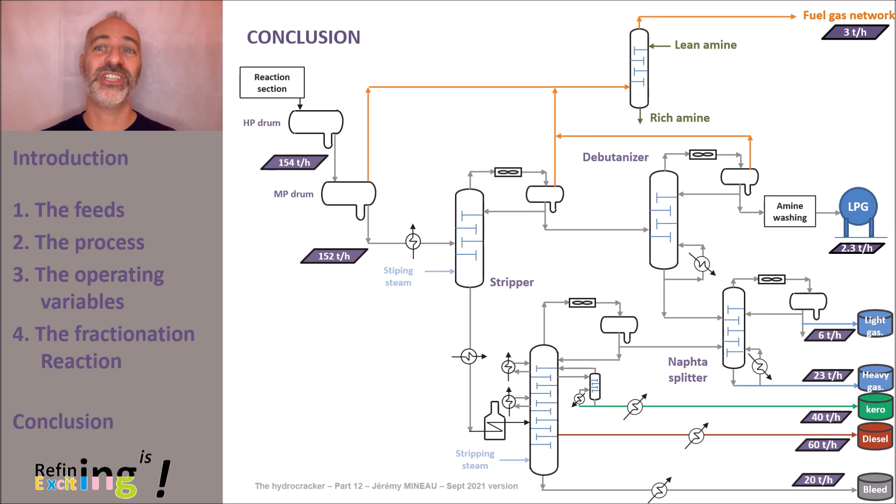Let's now have a look at the properties of the products and compare them to those of the FCC. Let's start with the fuel gas and LPG cuts. These cuts are H2S free since they have been washed with an amine. The main difference with the FCC is that these cuts do not contain olefins, so they are totally saturated. Indeed, the LPG cut of an FCC contains a significant amount of propylene, which will not be our case.

In terms of mass balance, if you remember the MOOC dedicated to FCC, we produced a quantity of fuel gas of about 5 tons per hour for a total feed of 150 tons per hour. In our specific case, we will produce 3.8 tons per hour of fuel gas, including 0.8 tons per hour of H2S. Note that in the fuel gas section of the FCC, we had about 71 weight% of C1 plus C2 and 28 weight% of C3 plus C4. In this cut from the DHC, we will have 25 weight% of H2S, 25 weight% of hydrogen plus C1 plus C2, and about 50 weight% of C3 plus C4.

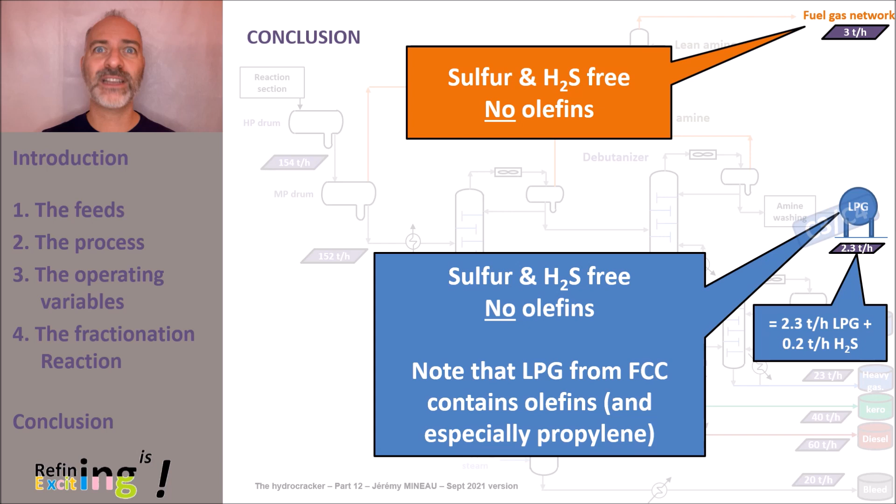As far as LPG cuts are concerned, in the FCC we produced about 23 tons per hour. Here in the DHC we will produce 2.5 tons per hour. These two streams are almost exclusively composed of C3 plus C4.

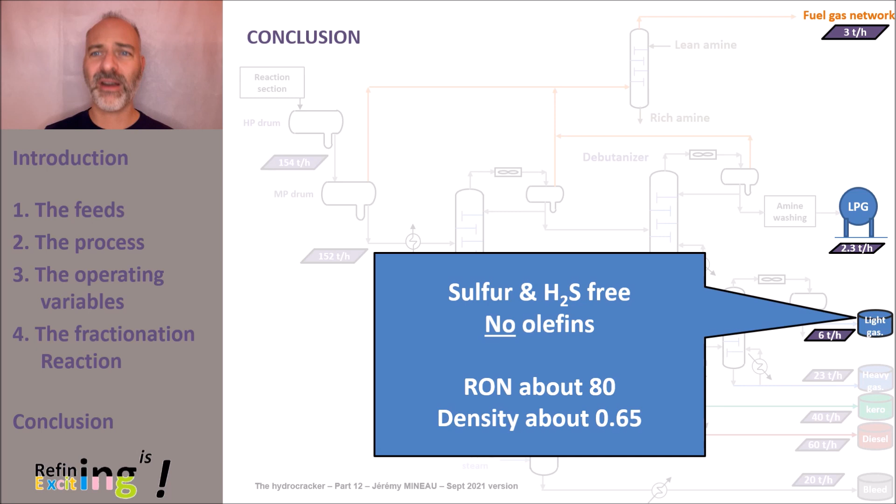Light gasoline is completely sulfur-free, since it was produced in a reaction section in the presence of hydrogen. It therefore does not require any hydrotreatment. This stream has a RON of about 80 and a density of about 0.65. It is a very paraffinic cut. Here we produce about 6 tons per hour.

For heavy gasoline, it is quite similar to light gasoline in terms of sulfur - this is an absolutely sulfur-free cut. Its density is about 0.74 and it is a very good naphthenic cut, so it will be a very good feed for the reforming unit of the refinery. Here we produce about 23 tons per hour of heavy gasoline. In the DHC we will produce about 30 tons per hour of total gasoline, whereas in the FCC we will produce a mixture of LCN plus MCN plus HCN of about 72 tons per hour.

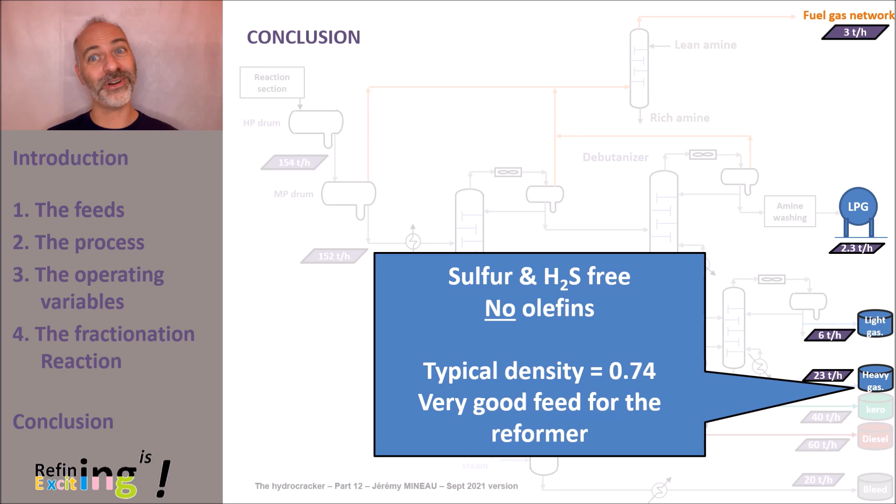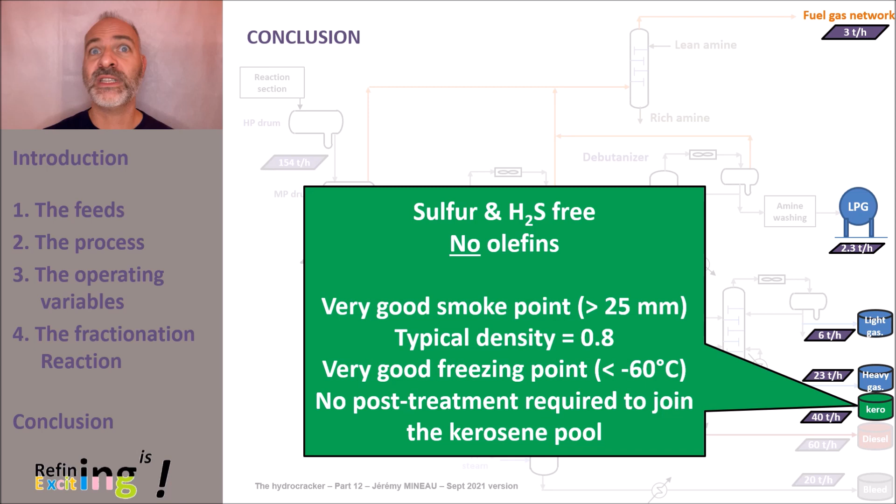The kerosene produced in the DHC has very good smoke point properties of about more than 25 millimeters. The density is about 0.8 and the freezing point is very good, below minus 60 degrees C. No post-treatment is therefore necessary to reach the refinery's kerosene pool.

The diesel cut produced in the DHC will have a very low sulfur content, just like the kerosene, lower than 10 ppm. The density is in the low range of the diesel characteristics asked by the regulation, here about 0.83. The cetane index is very good, about 60, and no additional treatment is necessary to let this diesel cut join the refinery's diesel pool. 58 tons per hour of diesel are produced in this DHC. For memory, in an FCC we produced a cut of LCO of 26 tons per hour. This figure shall be compared with the value of 58 tons per hour of total diesel produced in this DHC.

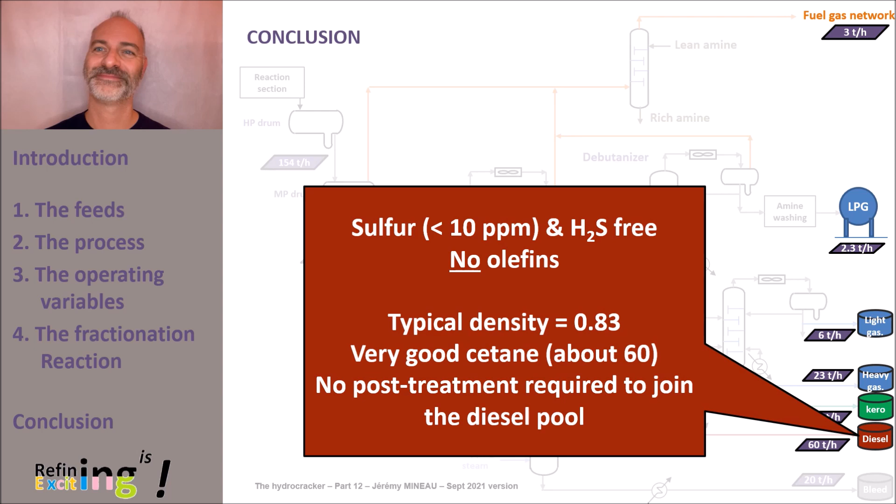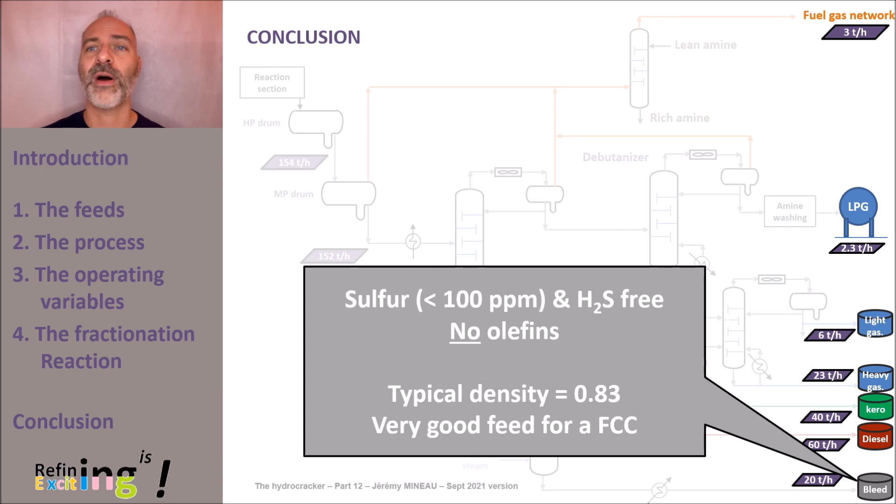Finally, the bottom cut, called here bleed, is a very paraffinic cut and has a very low density of about 0.83. Its sulfur content is quite low, lower than 100 ppm, and it is a very good feed for FCC, for example. We produced here about 20 tons per hour, whereas in the FCC we had a cut of unconverted VGO of about 16 tons per hour.

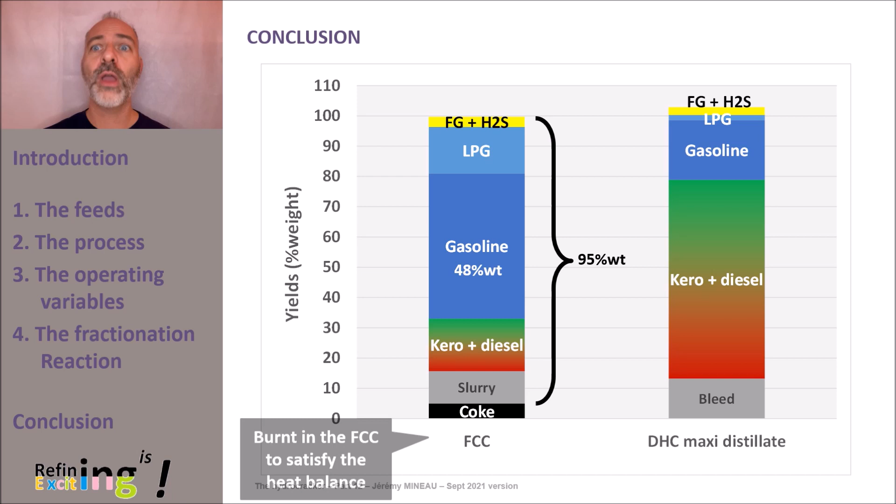If we summarize, here is what we get with an FCC, and here is what we get with the DHC in maximum distillate mode. The conclusion is that the FCC produces mostly gasoline. Note that about 95 weight% of the feed is converted into products. In fact, we produce 5% of coke, but this coke is self-consumed to satisfy the overall thermal balance of the FCC. Note that the products coming out of an FCC contain sulfur, nitrogen, aromatics, and olefins, and they all require downstream treatments. I invite you to watch the MOOC dedicated to the fractionation section of the FCC.

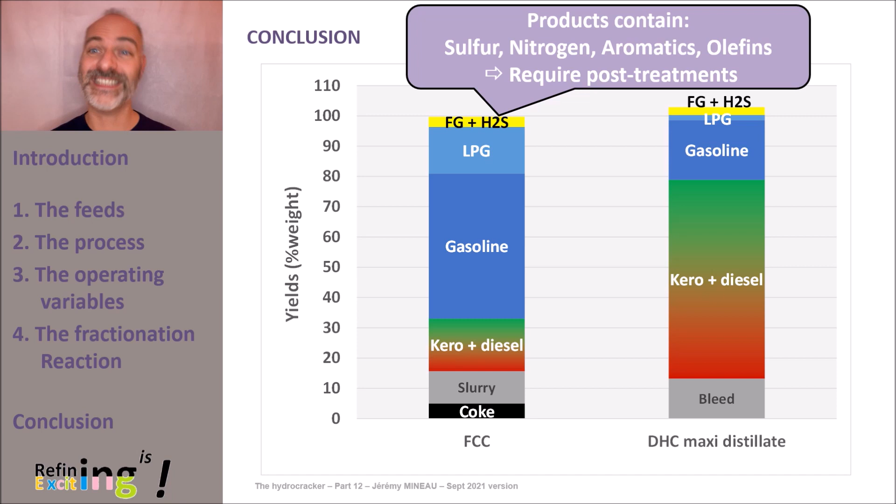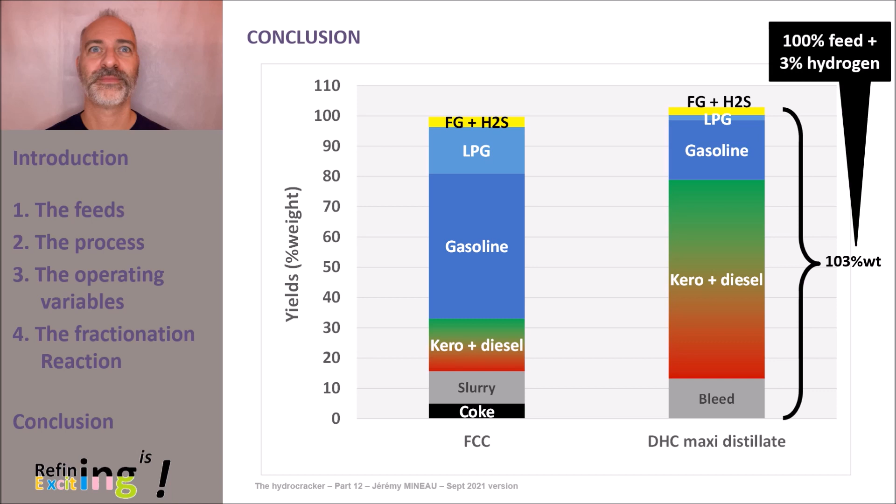In a DHC, we convert about 103 weight percent of the feed into products. In fact, in a DHC, we consume about 3 weight percent in hydrogen. The products coming out of a DHC are sulfur-free, nitrogen-free, olefins-free, and they present a quite low aromatic content. They require very little or no post-treatment for all the products coming out of this DHC. On the other hand, it requires a substantial need for hydrogen, and this hydrogen is often produced from natural gas by reforming.